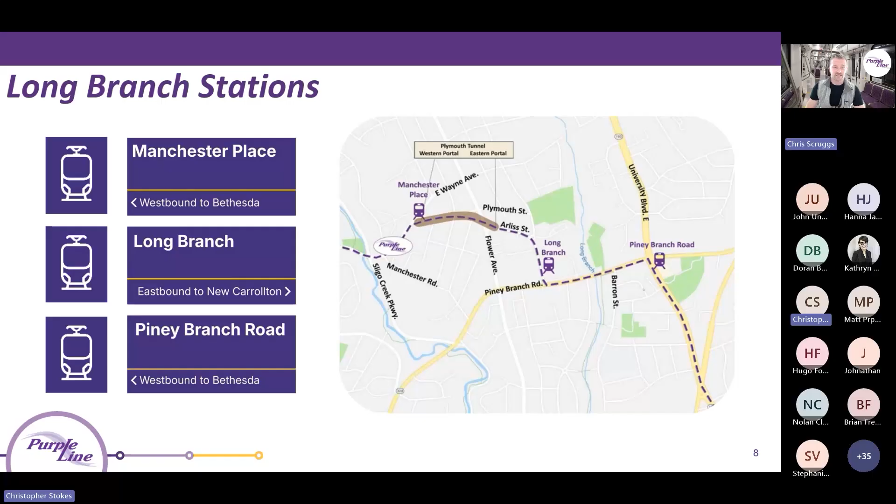Tonight, we'll cover the segment of the Purple Line alignment that includes the following three stations: Manchester Place, Long Branch, and Piney Branch Road stations.

As previously mentioned, you are some of the first to see our new Spring 2026 progress video. The Purple Line project has truly transformed throughout 2025, and now in 2026, the Purple Line light rail vehicles are in motion across the eastern side of the alignment from New Carrollton to Adelphi Road. Our latest video highlights Purple Line's incredible progress, and this year, we've included stories showing how Purple Line connects communities across Montgomery County, Prince George's County, and beyond. Chris, let's play the video.

I believe that this Purple Line will help businesses. I think that it's going to make people's trips to getting to jobs and to the University of Maryland amazing. It'll be much easier to do shopping, get to the local libraries. And the Purple Line is going to be like a brand new baby. It's going to be so exciting. I'm thrilled. I'm thrilled. Yes. Yeah, we're really looking forward to it.

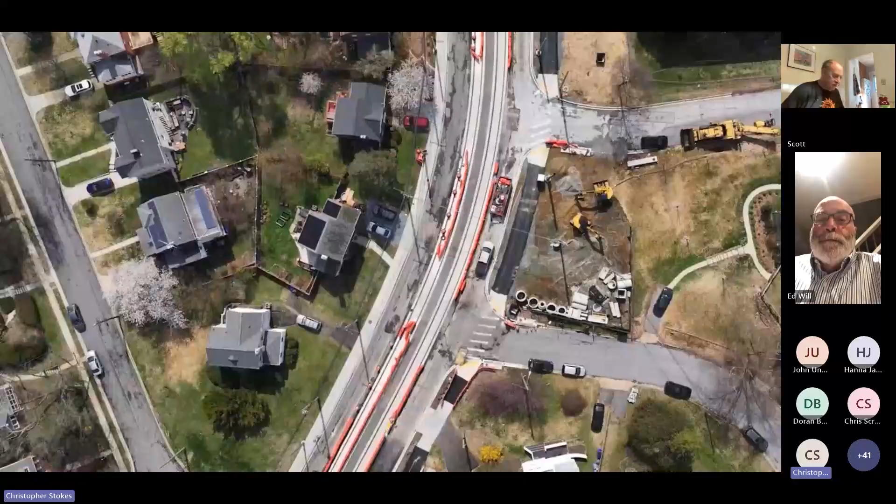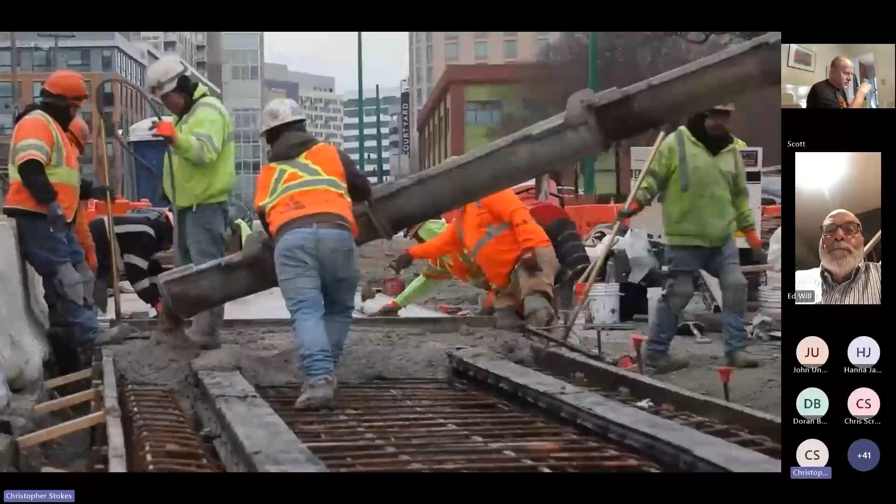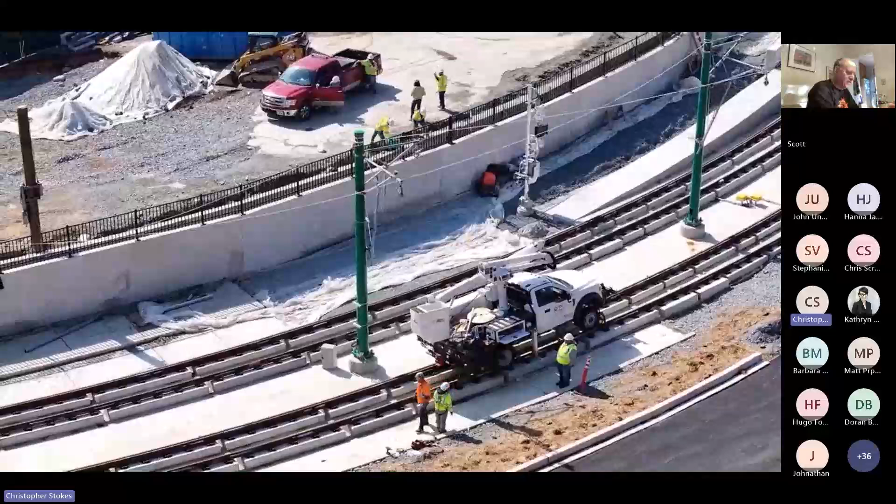Earlier this spring, Purple Line crews installed the final section of track on Wayne Avenue, an important project milestone. With the rails now in place, the project shifts focus toward the systems that power and operate the Purple Line, from the overhead power that energizes the trains to the communications networks that keep everything connected. This is where the railway really comes together. More than 1,000 live feed cameras, thousands of sensors, and integrated traffic control devices are being installed along the corridor.

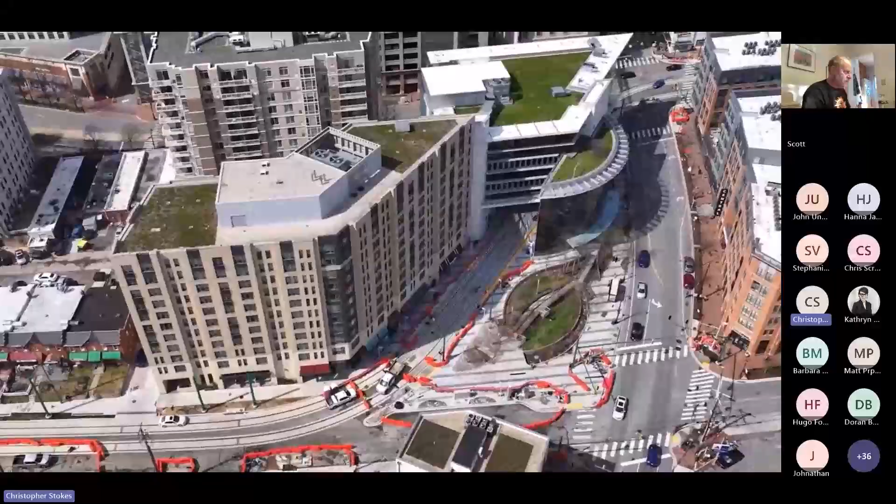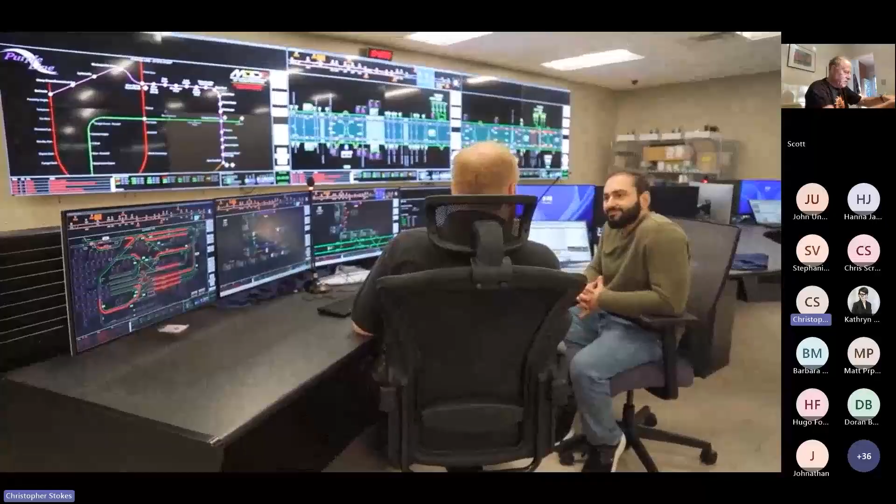These systems communicate with stations, intersections, and pedestrian crossings to keep riders and the surrounding communities informed and safe. Once testing is complete, operators in the control center will be able to see every light rail vehicle in real time and monitor activity across the entire system.

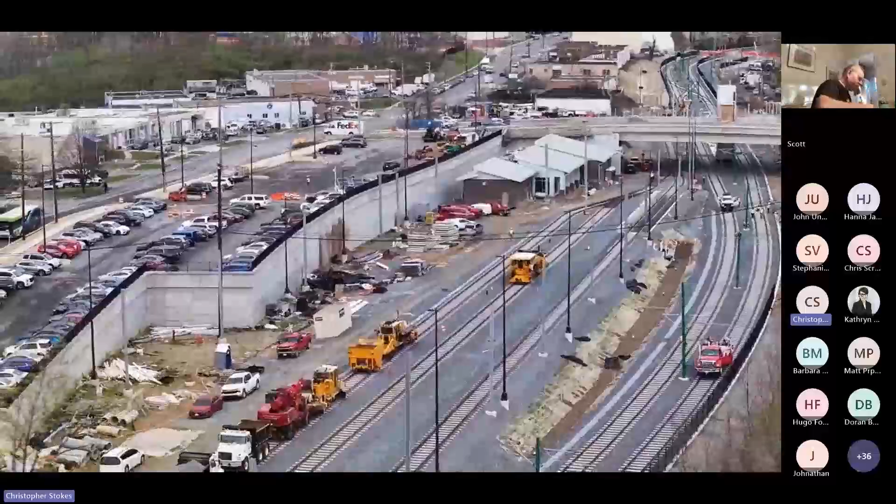Supporting those operations, the Lyttonsville Operations and Maintenance Facility is nearing completion. The facility includes additional storage tracks, maintenance areas for the light rail vehicles, and a backup control center to support trains as they move along the line.

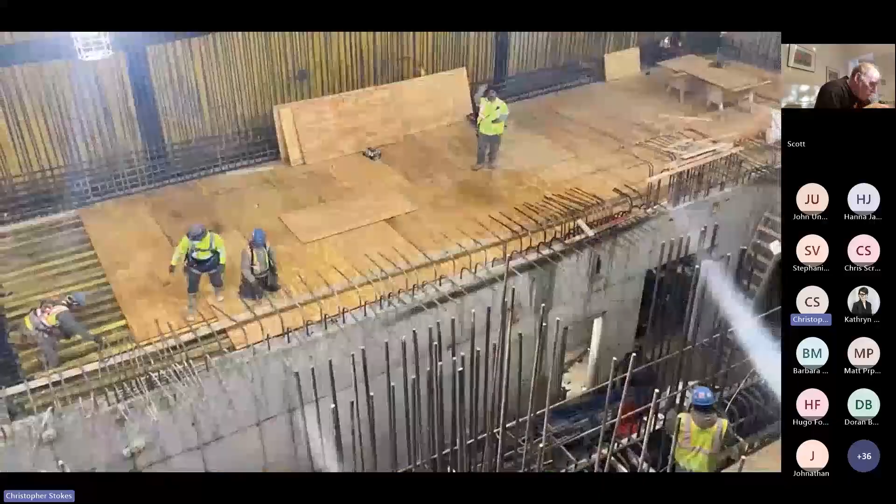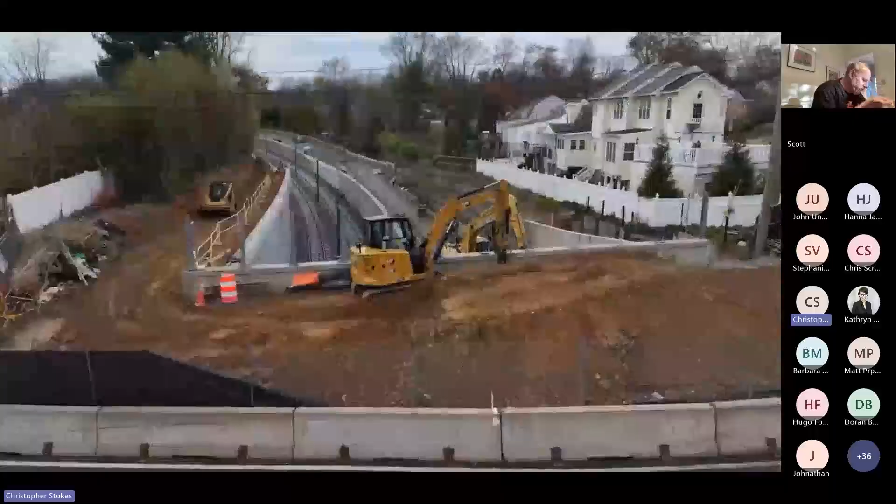In Bethesda, progress continues on the station lobby located just below ground level, and as crews place tons of concrete for the elevators and the cavern, preparations are underway for the complex connection between the Purple Line and Metro's Red Line. Work is also advancing on the Capitol Crescent Trail, where crews are constructing new retaining walls, installing drainage, and beginning paving operations between Bethesda and Silver Spring.

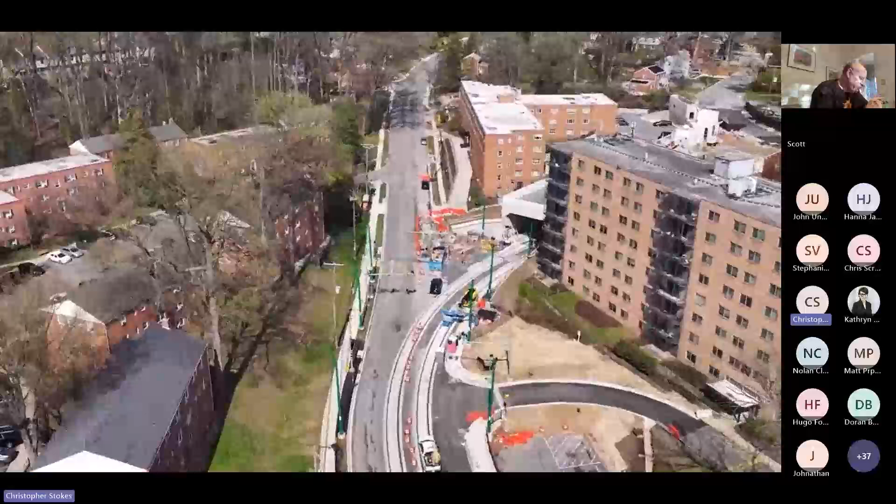Across the corridor, crews are also completing sidewalks, driveways, and other finishing touches that reconnect neighborhoods and restore the streets surrounding the new line.

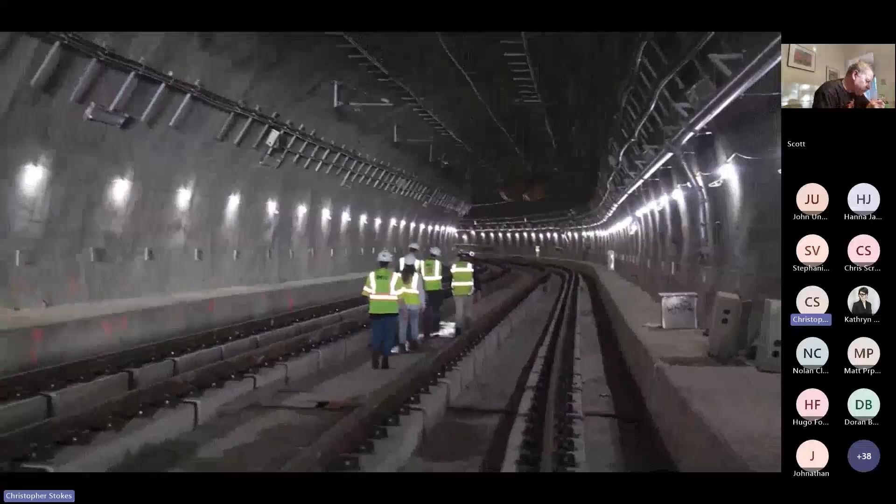Inside the Plymouth Tunnel, track installation is complete, and crews are now installing the overhead wiring that will power trains through the tunnel. With spring growth, the project's corridor will be turning green as crews plant thousands of trees and other landscaping elements along the alignment, restoring the corridor and enhancing the communities along the line.

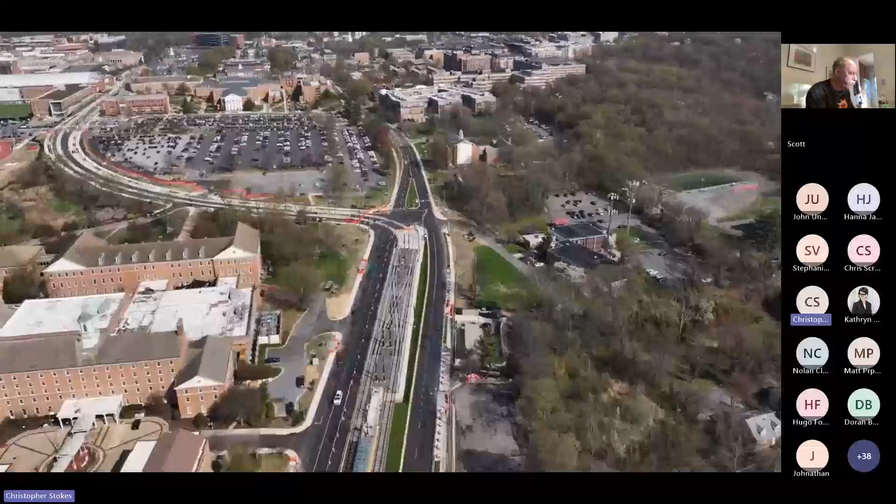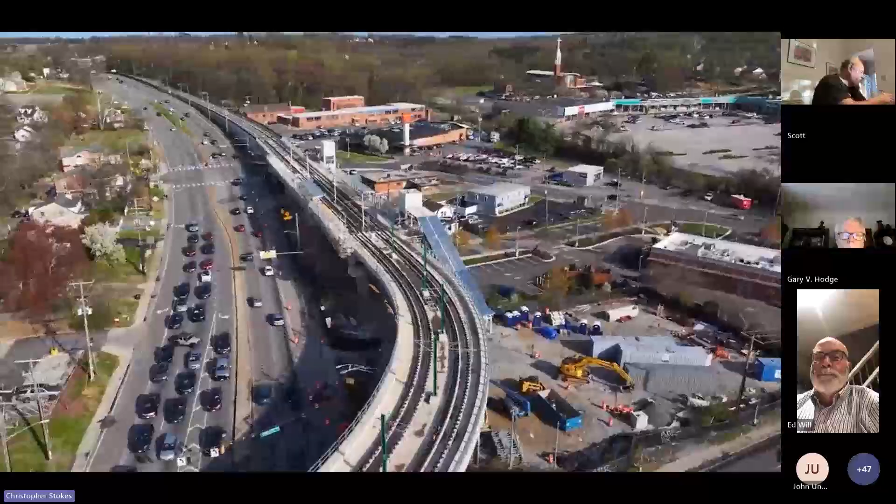Through the University of Maryland and Prince George's County, heavy construction is giving way to finishing crews and the installation of complex systems and utilities. The elevated station in Riverdale now has elevators and stairs in place, signaling its readiness to begin serving the public.

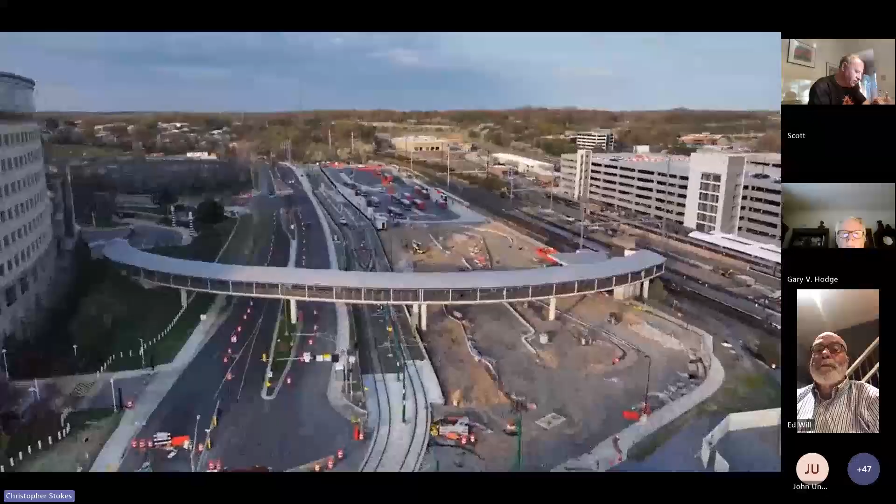At the Purple Line's eastern terminus, crews are also applying final finishes, and construction along Ellin Road is nearing completion.

Meanwhile, system testing continues along the Purple Line. Light rail vehicles have already traveled from New Carrollton to the University of Maryland campus, and testing will continue along the entire corridor in the months ahead. Testing typically takes place at night and is supported by maintenance of traffic teams and local police directing traffic to help keep everyone safe.

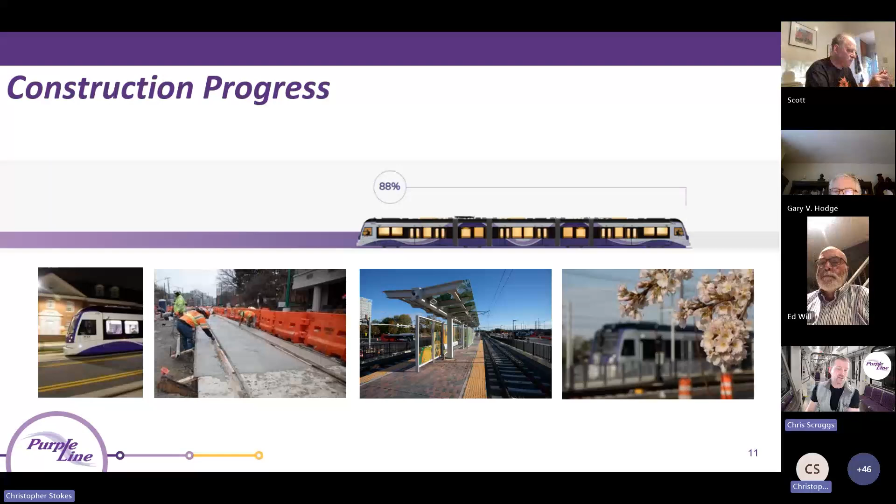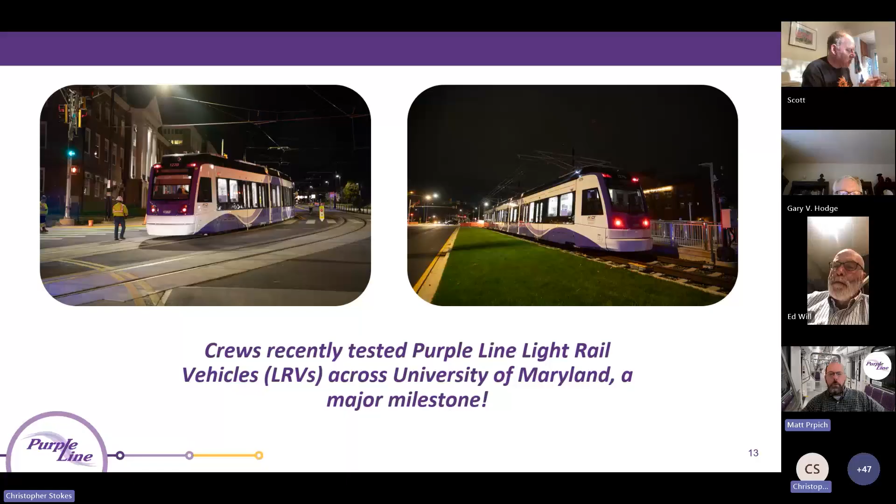Great, thanks, Chris. Good evening, everyone. Here we have some great photos of the major, exciting milestone we achieved moving the vehicles into our initial testing on the University of Maryland.

Our Glenridge Operations and Maintenance Facility - the facility is up and running. It is the headquarters of our Purple Line Transit Operators agency operating the system. The Purple Line Operations Center, lower left corner, you can see a good video of that, where they will monitor and control the system, as well as housing the LRVs, the maintenance areas, and the car wash.

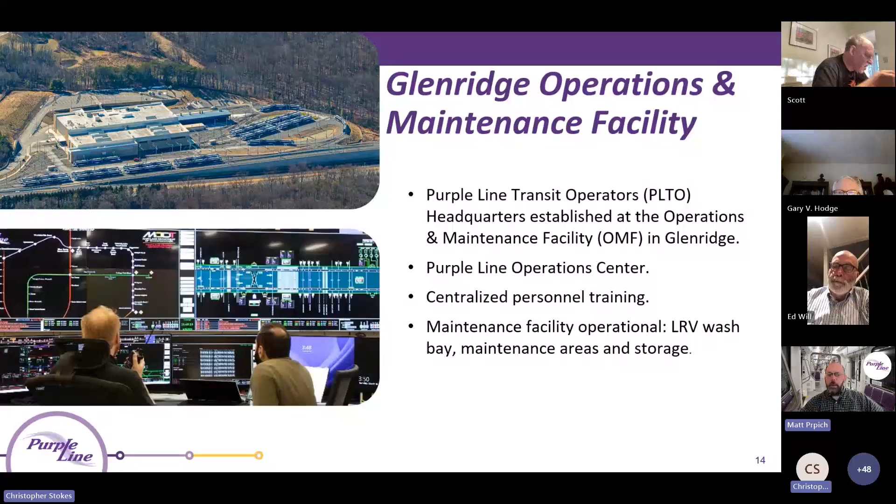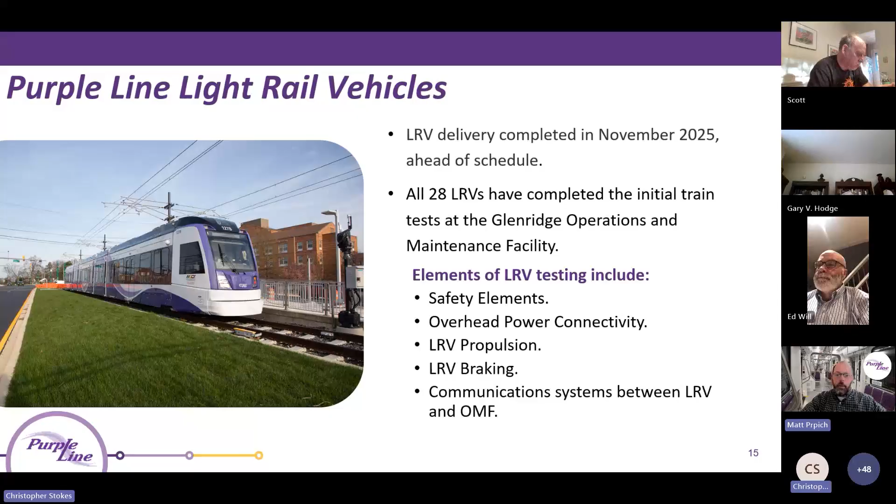Speaking of the vehicles, as mentioned, all 28 vehicles have been delivered and have completed their initial testing at the facility. Some of these elements being tested are safety elements, overhead power connectivity, propulsion braking, and the communication systems between the LRVs and the Operations Center.

Purple Line testing. So the testing out on the alignment, testing of the completed rails, the overhead catenary wires, onboard control systems, traffic signals, gates, other systems occurring out along the alignment.

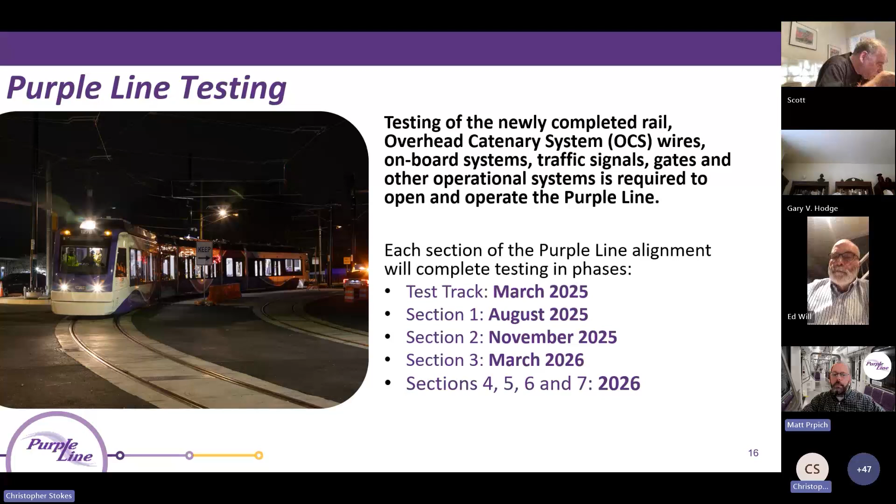Each section of the alignment is completed in different testing phases. Test track, of course, was March 25, Section 1, August. We are now moved into the University of Maryland, Section 3, and we will be moving into the remaining sections this year.

Maintenance of traffic during testing. Until all of the traffic control systems are operational and fully tested and certified, we will be utilizing maintenance of traffic crews, including police flaggers, intermittent traffic stops and road closings to facilitate our testing in a safe manner. We do develop specific maintenance of traffic protocols for each section.

Hours of testing are nighttime, 9 p.m. to 5 a.m. through the end of this year. And the public should consider any section during testing to be live and expect to see the LRVs periodically during that period.

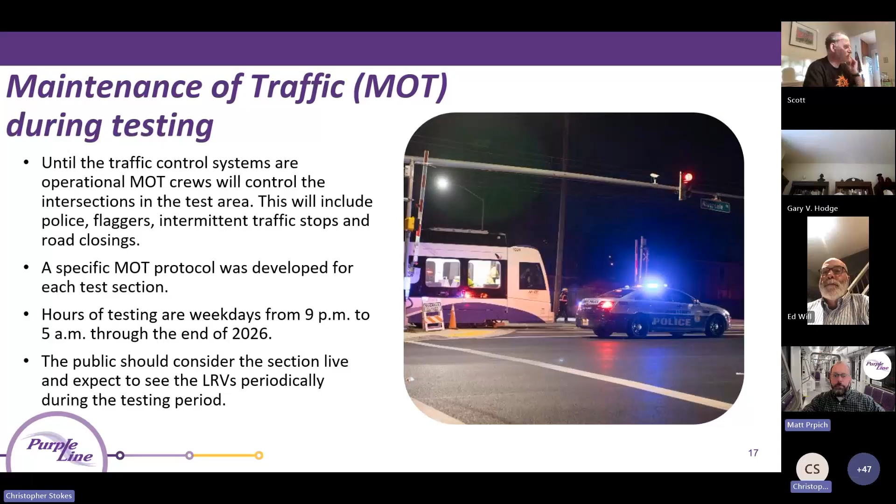Outreach. The testing outreach conducted door hangers throughout the neighborhood, on-site notifications using variable message signs, UMD outreach coordination signs and flyers. We've been conducting in-person outreach at schools, local businesses, school safety presentations highlighting best practices. We do have our Ride Safe bike and scooter safety outreach program as well.

There's a new testing and safety page on purplelinemd.com, so everyone's encouraged to check that out. And we also have safety-focused social media campaigns and public notification outreach lists that we utilize to make sure everyone's informed.

Probably the most important thing to bring up tonight, testing safety. So during and after testing, it's important that everyone considers the tracks and the OCS live and expect to see the LRVs moving. A few safety reminders.

See the tracks, think train, obey all traffic signals, and no different than a roadway, always look both ways before crossing the tracks. Use the approved crosswalks only. Do not walk near or on the tracks, and do not stop or park on the tracks.

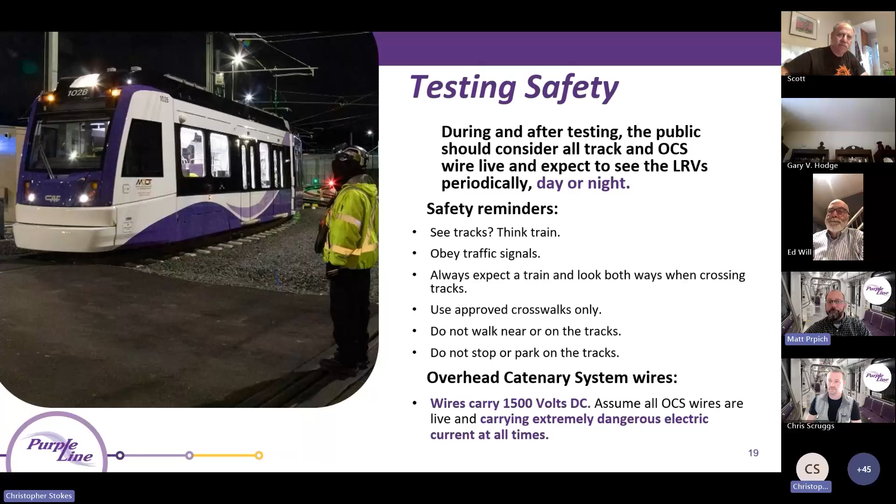On the western portal of the tunnel in Wayne Avenue, we have completed all the retaining walls. As it was mentioned in the video, the track inside the tunnel has been also completed. We have been continuing with the drainage, water, and sewer utilities.

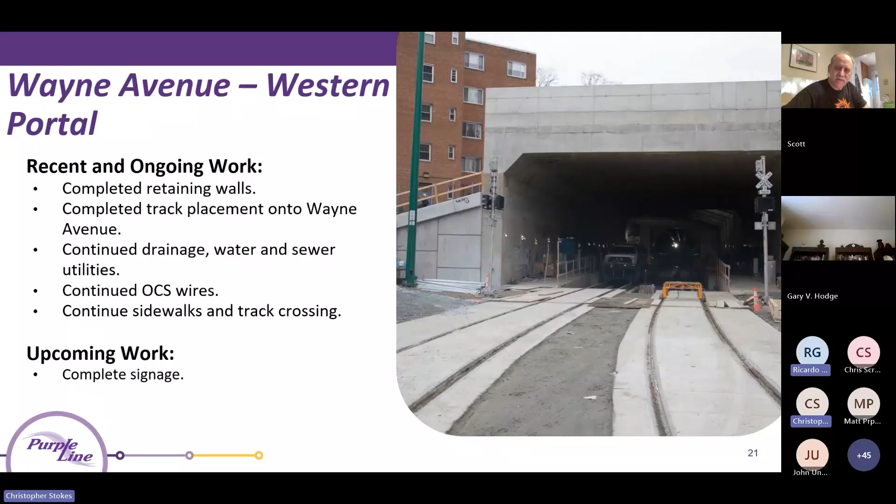And we are currently working on the OCS, the overhead catenary system inside the tunnel, aiming to finish within the next month. And we continue working on the sidewalks and track crossings. Coming up, we'll start seeing signs for the roadway and the train being installed.

Inside Manchester Place Station, it's looking very good actually. I think everybody's gonna like it once it's in service. Right now, the platforms have been completed. The track is completely finished.

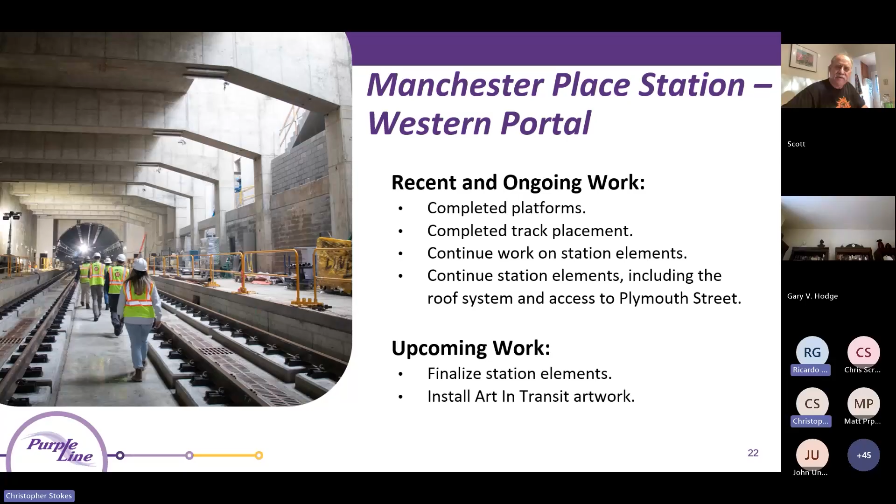We are right now working on multiple station elements, and that's gonna be an ongoing work throughout the next couple months. We are also working on the roof system and on the canopies and on the access from Plymouth Street. Coming up, we are gonna finalize all the station elements, including the walls and the art in transit artwork.

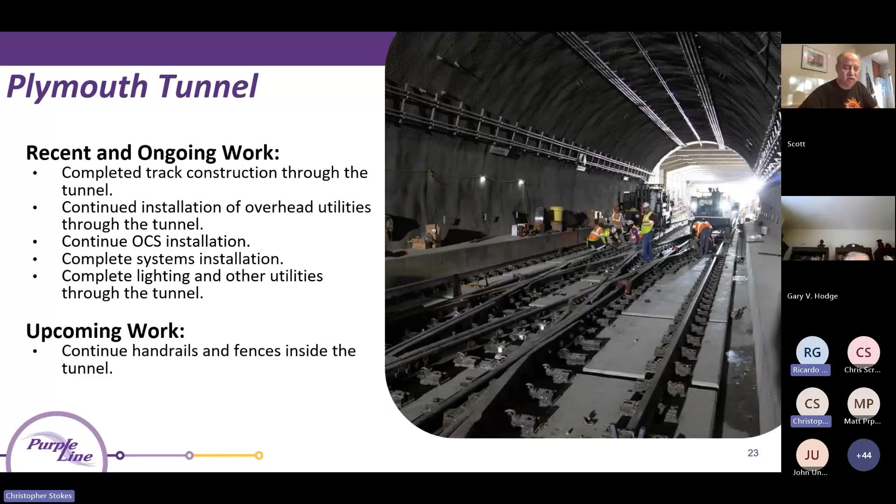Inside the tunnel, we have completed the track. We continue on the installation of the overhead utilities, the overhead contact system, the systems installation, and the lighting inside the tunnel. Coming up, we're gonna have the handrails and fences in both portals in the access of the tunnel.

On Arliss Street, we have also completed the track coming out of the tunnel. All the drainage has been finished, and all the parking lots for the different residential areas are also done. And we are currently almost finishing installing the curbs and sidewalks.

We just paved Arliss Street. Coming up, we're gonna do the final surface asphalt of Arliss Street, the pavement markings, and the signals.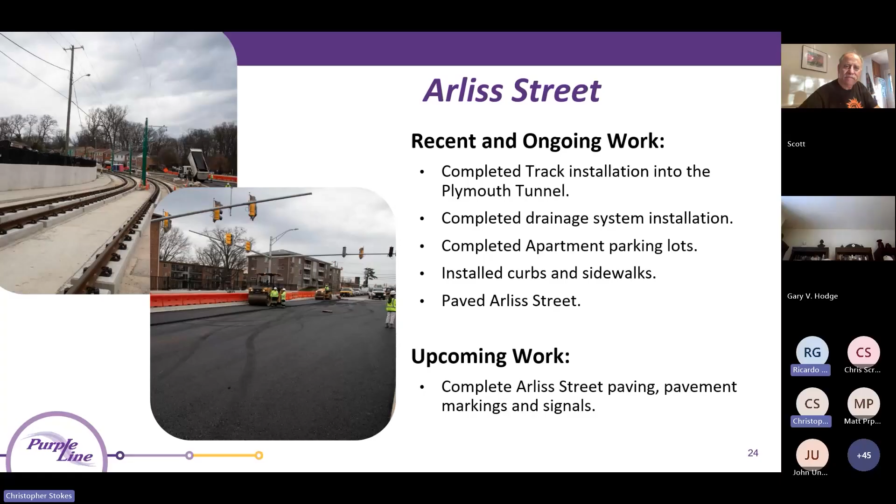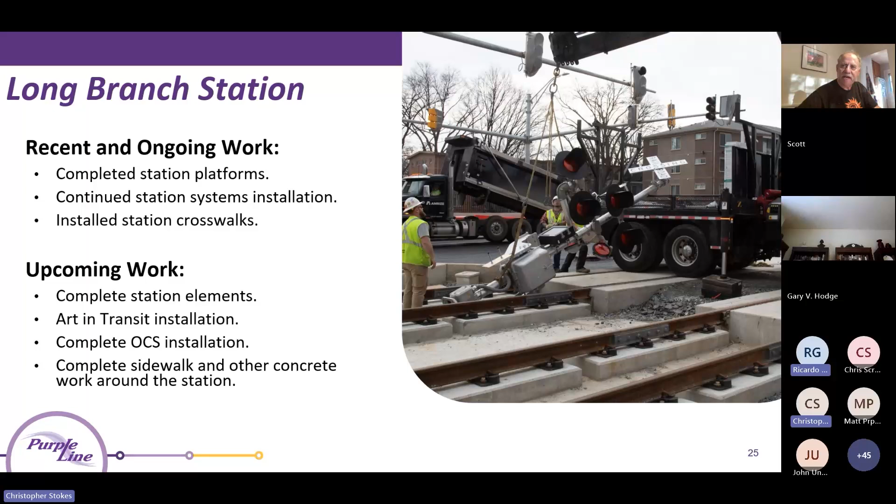In the station, we have completed all the platforms, and we are currently working on the systems and the crosswalks and sidewalks on the corners of the stations. Coming up, there are multiple other elements we're working on, like the art in transit at the corner of Arliss and Piney, the overhead contact system, and the sidewalk and other concrete around the station.

I'm going to pass it to Javier Devesa, who is going to talk about Piney Branch. Thank you very much. All right, thank you, Ricardo. Let me brief a little bit on the works on Piney Branch Road.

We have completed the tracking, as you can see in the entire area. Both track 1 and track 2 have already been completed. So you can see the rails and the OCS, all the catenary poles as well, completed.

There's going to be a big operation for asphalt. Let me go straight to the point for the big asphalt operation in the upcoming weeks. We are starting the last week of April, and it's going to be everything completed by this summer. There's going to be a full asphalt operation in the whole Piney Branch Road.

We're going to start first with the eastbound right lane, and we're going to switch to the westbound right lane. We're going to go in a loop, then the eastbound left lane, and finally complete the loop with the westbound left lane. So basically, the whole stretch of Piney Branch Road is going to get the permanent asphalt, which is also going to include the permanent striping, permanent markings, and the signs.

We have already started installing some signs in the permanent configuration. So you're going to see the final product for these three scopes.

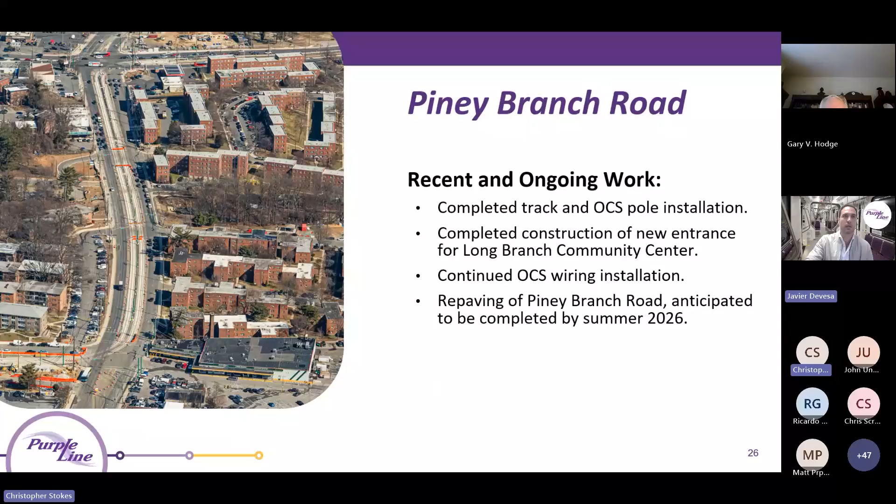All right, let me mention a quick MOT that we're going to be doing on Piney Branch Road. We are targeting the upcoming weeks, from 10 p.m. to 4 a.m., to do some OCS wire work in this section of Piney Branch.

So basically, as you can see on the map, vehicles are going to be able to detour through University Boulevard, Franklin, and coming back to Flower Avenue in both directions, north and south. We're going to make sure that public notice is sent accordingly, so everybody's aware of this with enough time.

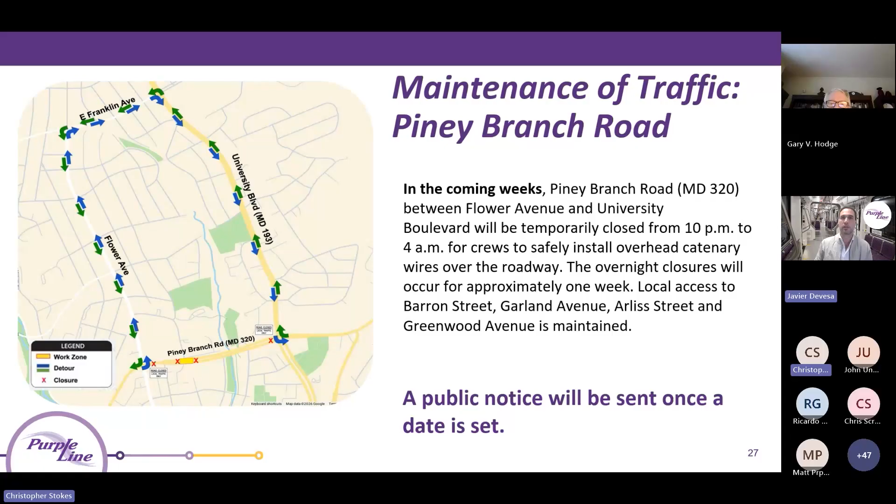Another small MOT is going to be implemented. The idea is to do this starting April 27th on Wayne Avenue. We're going to be doing it at the same time, from 10 p.m. to 4 a.m., for some OCS wires to be installed in that section. In this case, there's going to be a detour going through Sligo Creek, Piney Branch, and Flower Avenue.

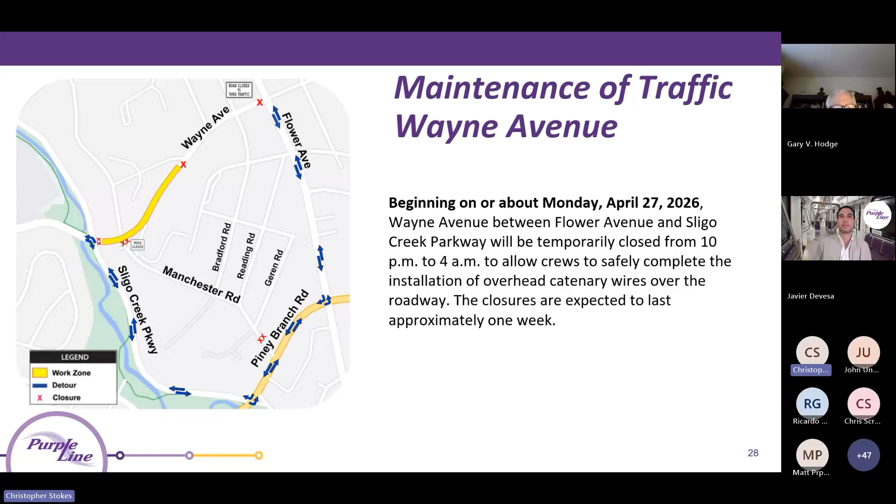All right, let me hand over to the next chapter, for business and community engagement.